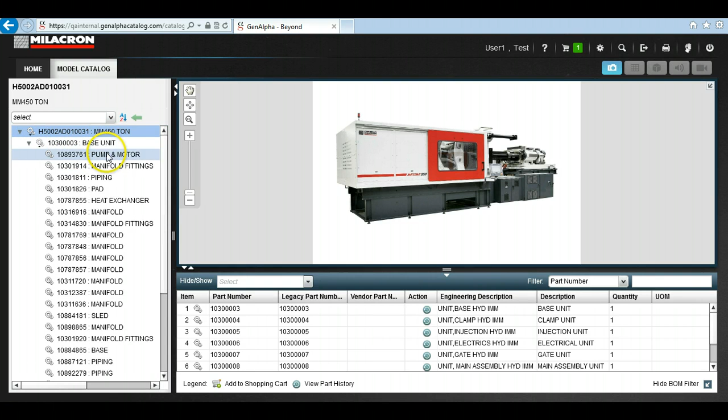So as I drop down the different layouts underneath the main component for the machine, I show all the different layouts underneath these assemblies, and I'm going to click on this pump motor combination and jump into that. I'll show a picture, a 3D picture, as well as the complete bill of materials for that layout just below the machine.

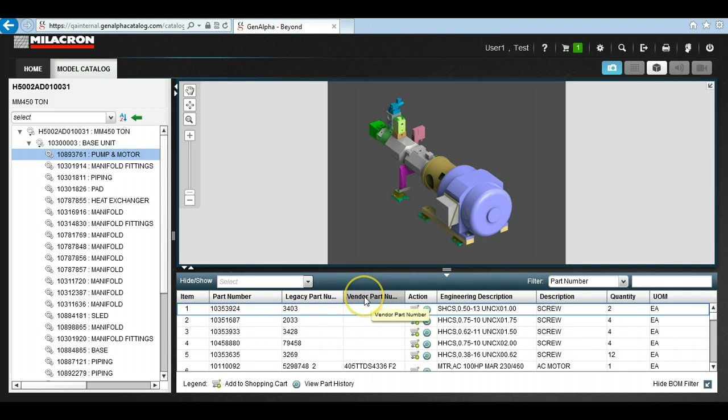As you can see here, I've got all of the parts that go along with that machine, and quite a bit of information: the part number, the legacy part number, vendor part number information, which will only be displayed internally to the Milacron user. I've got an engineering description, also internal-only, and then a commercial description, as well as the quantity of parts that exist on that machine for that specific part in the bill of materials.

As I click here on the 3D drawing of this pump motor combination, I'll take a moment to load the details, and I'll have a fully functional 3D version. I'm using my mouse here to spin this around and readjust the view of this layout, so I can look from angles I can't see when looking at it on the actual machine.

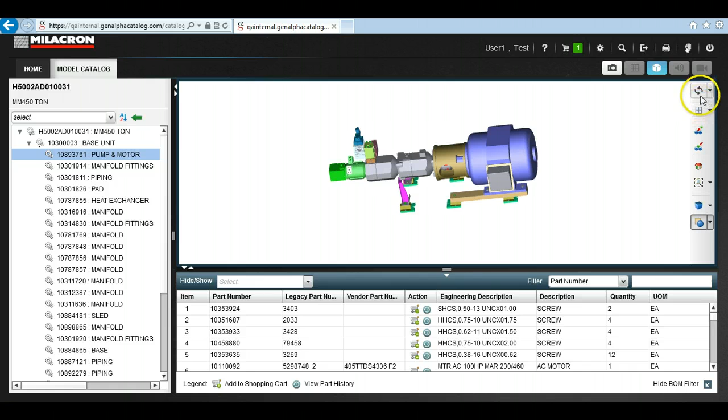So that's the orbit view I'm showing you right now. I'm going to go into the pull-apart and show you what happens as I pull these components off the layout drawings. As I select this motor, you can see as my mouse hovers over top of it, it provides the part number in the hover-over view, and then also selects that motor in the detail below. I've got that highlighted, and as I go through the various parts I'm pulling off, it will do that for each one of those parts.

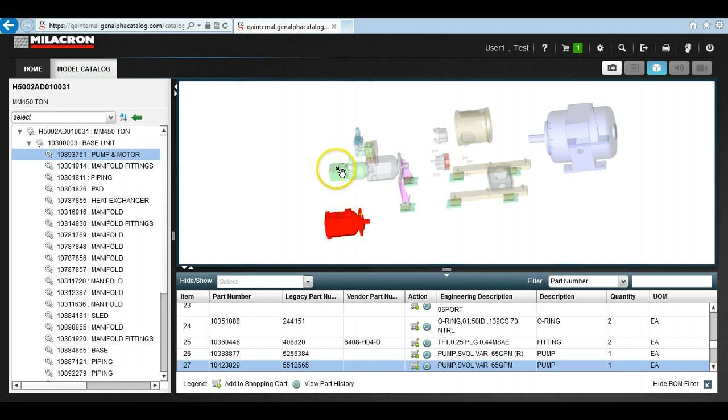So it's fully integrated and a full experience for the customer. They'll know what part number and what piece of material they're clicking on as they walk through the layout drawings in this 3D pull-apart view. Again, I have the opportunity to orient and spin this in any way I want to look at, including the ways where I've already pulled it apart, and I can look at that in the position it's at, continuing to see an incredible amount of detail about the part and the product.

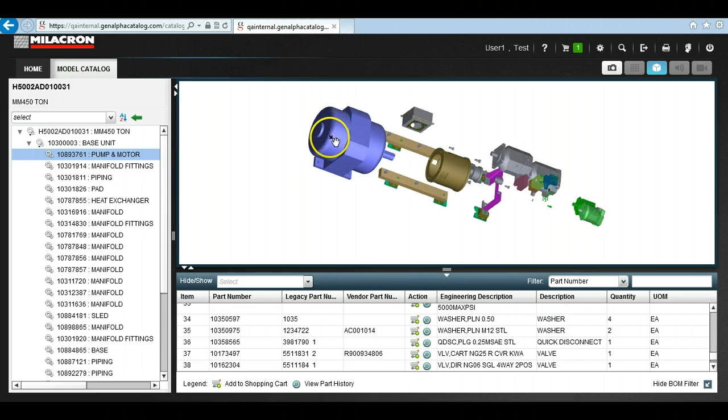So if I'm looking for this motor, and that's what I came on the site for, and I knew it existed on this pump motor layout, I can select that motor. From a shopping cart perspective, one click, add to shopping cart.

It's going to bring back pricing information, real-time pricing information, and even customer-specific pricing information. If we have a partnership agreement and have agreed to provide this part for a specific price to the customer, we'll provide their exact pricing that they agreed upon, and we'll also provide the availability information. We'll show if that part's real-time in stock.

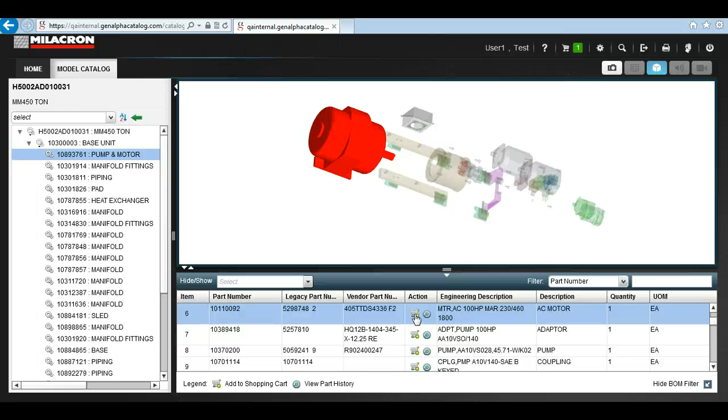So each of those components, the pump motor here, you can see it's showing where that pump motor exists, which layout. It'll show the price, and it'll show availability information here.

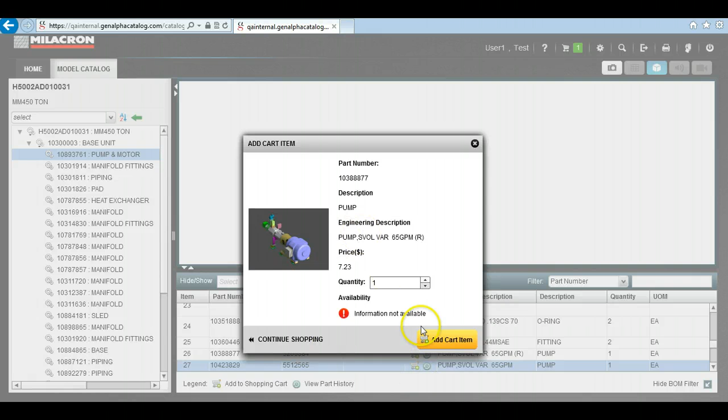Today I'm on a test site, a test server, so I'm not fully connected through the web services that we've created. But from a customer perspective, one click to show the item that you're going to add to cart, one click to add it to cart, and then from the cart perspective, once it's popped in the cart, it's really one click to place order.

So it's a very simple process for the customer as they go through the order entry process, reducing the amount of effort that they go through to essentially 3 clicks to place an order. So incredible amount of functionality in detail here in just a few minutes on this website.

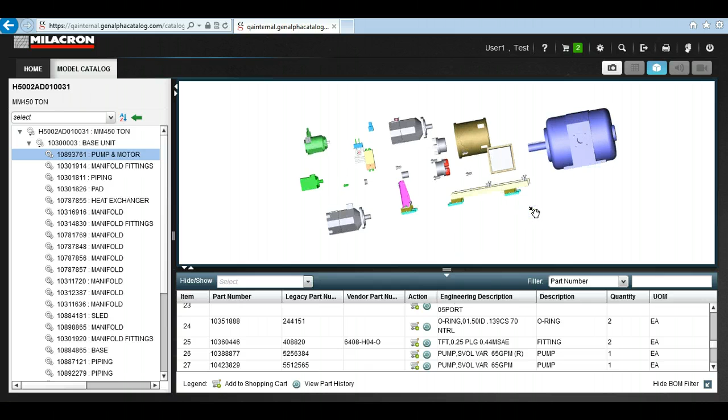So I'm going to click through a manifold drawing as well, because customers see a great amount of information through these manifold drawings. The engineering team, as they create these drawings, really highlighted the ports in color-coded format, so the customer can see which valve is going to which end of the port through these manifold blocks, and they'll be able to see that detail for where that hydraulic fluid is going through the machine in very detailed specs.

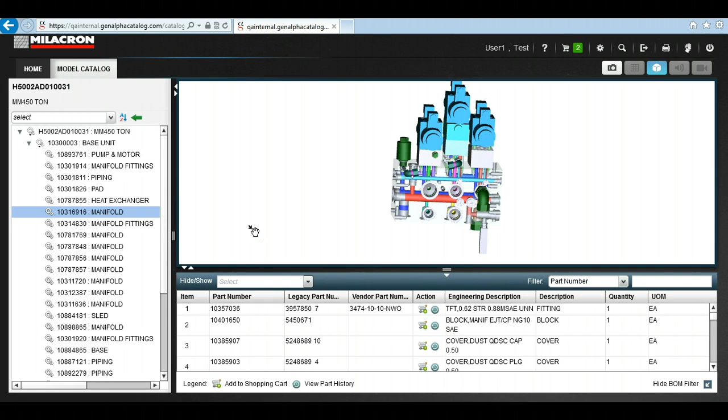So that's a real interesting part for the customer as they move forward, and really be able to provide some good feedback. And again, as I select these parts and move them around, from the customer's perspective, even down to these individual screws, I can see exactly what I'm looking at.

I'm looking at 4 screws, and I have, again, the part number, the legacy part number, the engineering description, the quantity, all highlighted for me as I move through this detail.

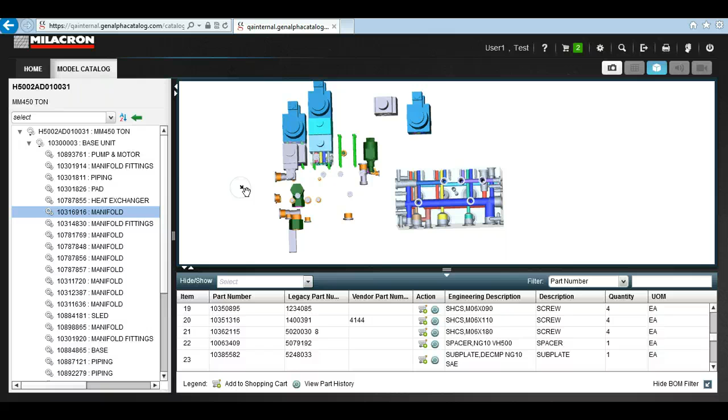So one of the other functionalities that we wanted to show here was the ability to have video played on this site. This MG1000 Maxima machine that was created for Bemis had a marketing video created for it, and we just placed this marketing video out here so that we can show that this functionality exists, as the customer would want to see videos on their site about their machine.

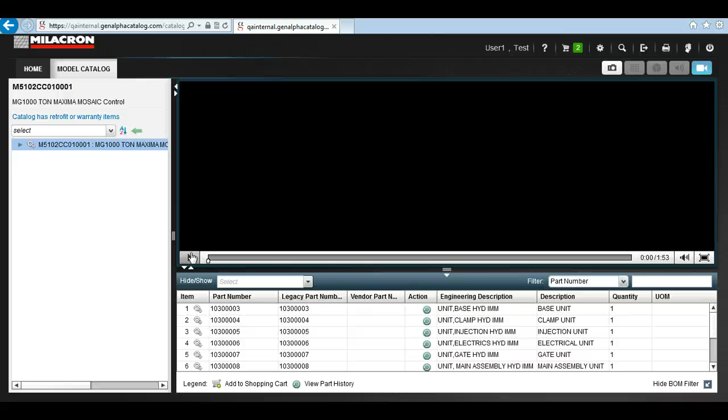So I'll expand this to full screen mode.

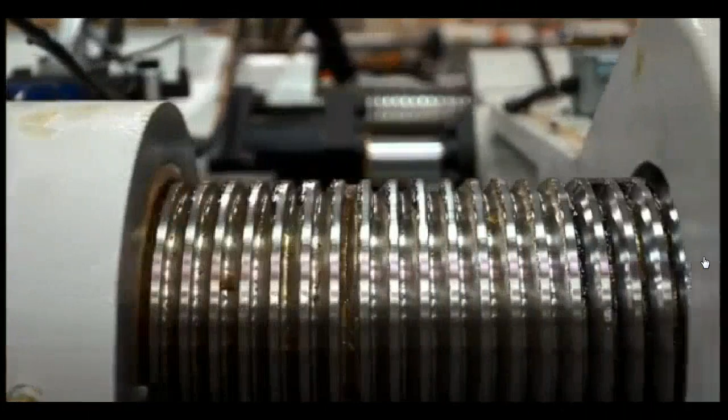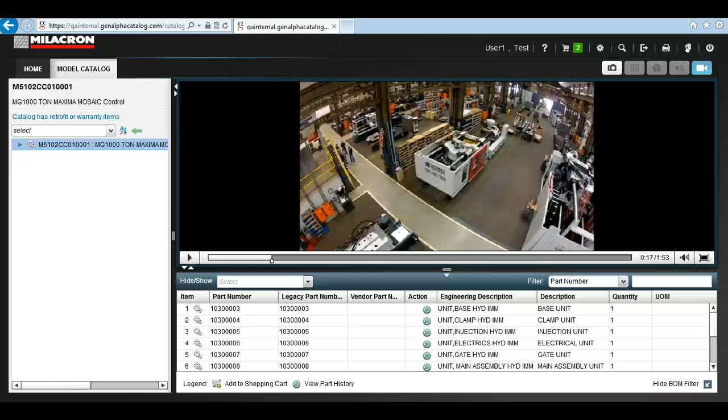From a customer perspective, this really gives an incredible amount of opportunity for them to have a runoff in our shop, only send a few folks, but actually record that and videotape it on our end, and actually then distribute that on this website to the customer, and provide quite a bit of information as they go through the training period. And everyone at their shop can view those training videos and see that detail of what they observed while they were at runoff, and understand the questions that were asked and the details that go along with that.

One of the other things I wanted to show was the 2D functionality. So we've got 3D for machines that, for a machine that started construction in 1997, we have 3D material for, but this website is going to go back to about 1992-93 from an electronic bills of materials perspective. So I've got machines that were constructed in 2D, where I'm going to have some access here to show some 2D information as we go through.

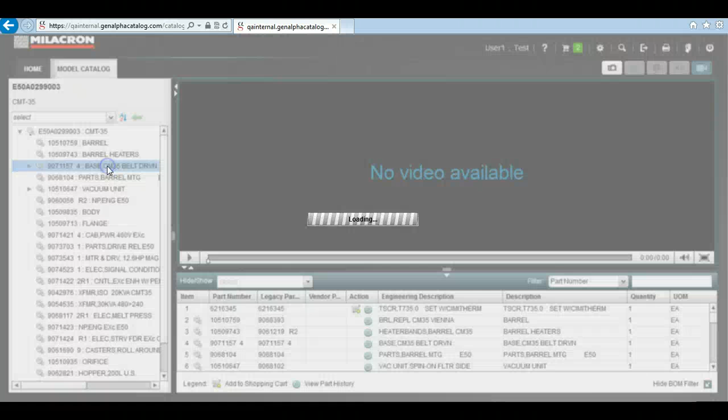So I'm going to select the 2D button here, and it brings up the 2D print. And as I click through this 2D print, I'm going to zoom in a little bit, and I'm going to select the various bubbles that are on here. As you can see, similar to the 3D option, it's presenting me a part number as I hover over, and as I select that, it's selecting that detail in the bill of materials below.

So again, incredible amount of functionality, incredible detail, still dealing with 2-3 clicks to purchase, and a lot of functionality for the customer there. So that was the ProVision 3D product.

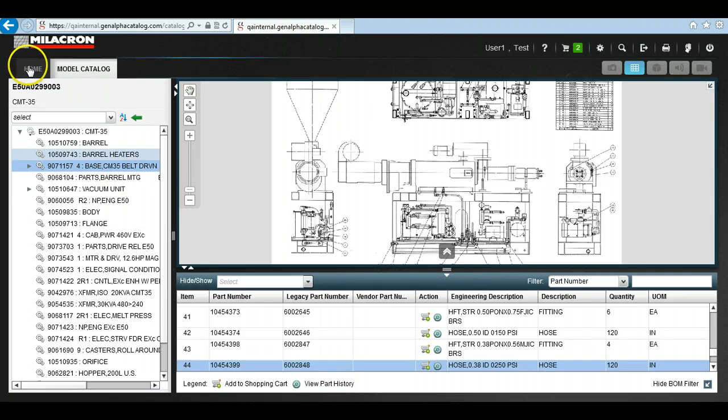We're going to be adding about 7,000 machines before the end of the year, so quite a few customers are going to be experiencing this.